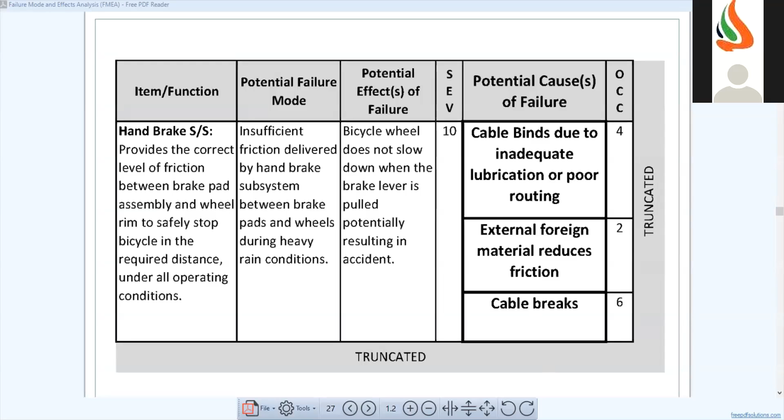Due to rusting, the friction will be reduced due to wear and tear. The friction will be reduced, right or not? What do you mean by foreign objects? If there is any dust on that, the friction will be reduced.

Cable breaks, so cable breaks are also a potential cause of failure. Why did we take cable breaks as a potential cause of failure? Because it also induces an indirect cause of failure. Cable breaks means, see, this is brake. This break is happening, this break is becoming two pieces. BRAKE versus BREAKS, this is a different break.

This is not hand brake. Okay, if cable breaks, if the cable becomes two pieces, it can cause a failure.

See, what is the occurrence? Occurrence means what is the probability of a

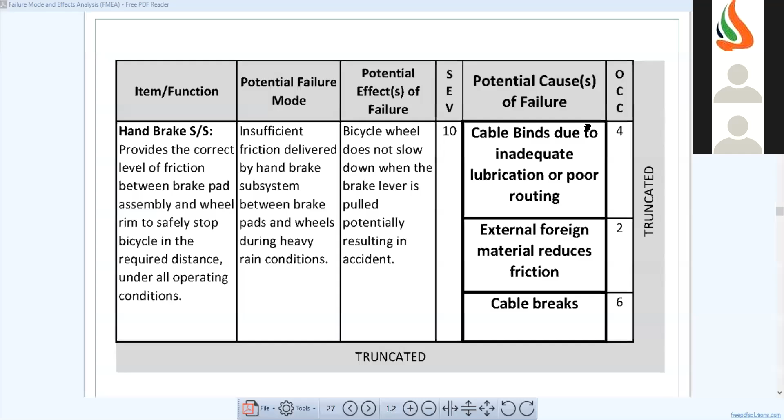Fine, occurrence is a ranking number associated with the likelihood. Occurrence is a ranking number that is associated with the likelihood of a failure mode, and this associated cause will be present in the item.

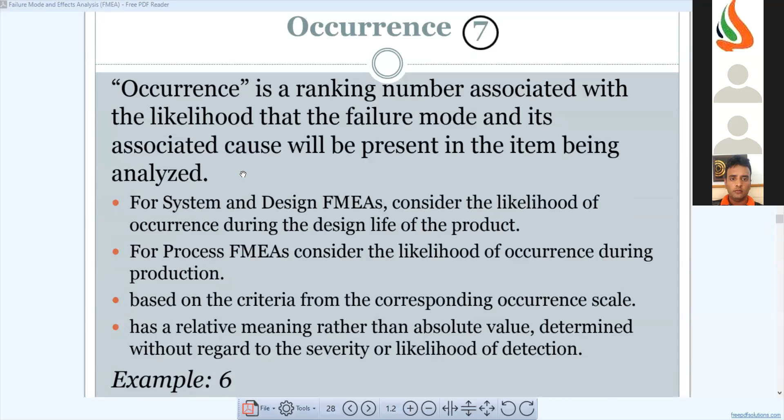Okay, we don't want to waste time. See here what we have. Here we have the rating of occurrence 5, 3. What is the 5 here? Occasional failures associated with similar designs, or in design simulation or testing. What is the 3 here? Only isolated failures associated with almost identical design, design simulation and testing.

So here, occasional failures. So what he is saying here is occasional versus isolated. Isolated means it's a failure which has low likelihood. It's a failure which is completely based on less likelihood. The probability is low, so failure also will be low.

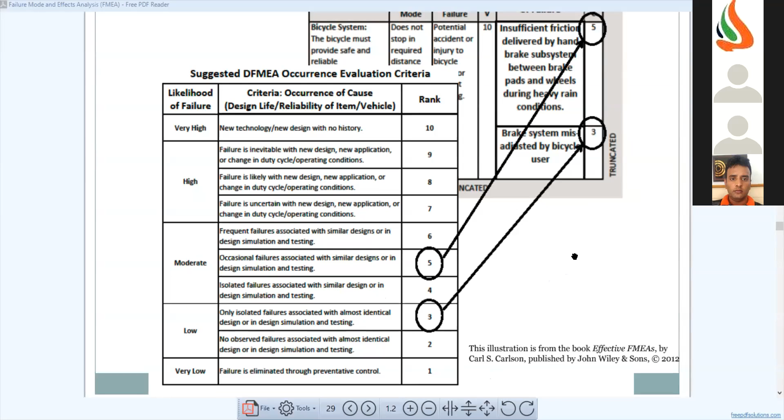So here, in which parts is he given 5 and 3? First one: insufficient friction delivered by the hand brake subsystem, occurrence is 5. Compared to 3, what he has taken: braking system misadjustment by bicycle user. This happens only sometimes, that happens often.

Okay, that's the reason occurrence is given, likelihood is given. Occurrence is something else. When you're calculating risk assessment, when you're doing risk matrix, when you're doing risk analysis, how do you calculate risk? Risk is a combination of likelihood and severity. So here likelihood is occurrence. Here in FMEA, occurrence is likelihood, severity remains the same.

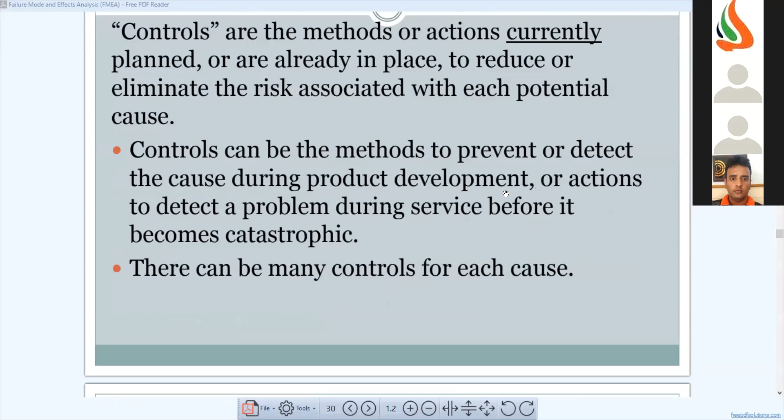Controls are methods or actions currently planned or already in place to reduce or eliminate the risk. Here we have potential causes and failures, and this current design controls and prevention. We have two terms here: preventive controls and detection controls.

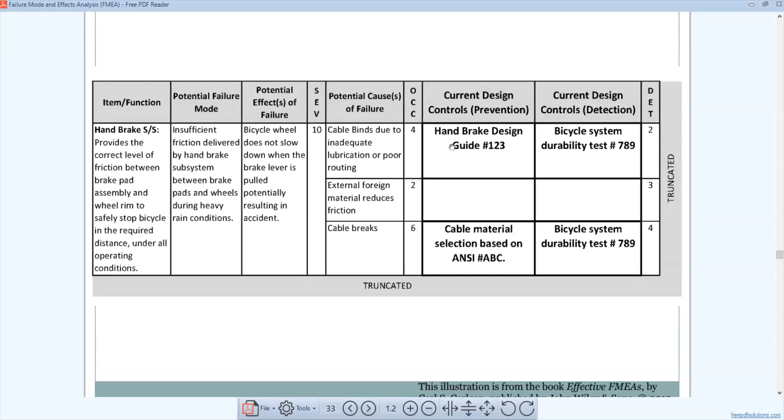So let's look at occurrence. What is a preventive control? Handbrake design guide - preventive controls always depend on the manuals, including operation and maintenance equipment.

The operator manual, or OEM - what is the manual we have for machinery? OEM, operators equipment manual. That is the design preventive control.

If we follow the operator manuals or operator equipment manuals, and if we have a clear idea on what to do and what not to do, that comes under preventive control. Cable material selection is based on some standard - let me confirm what it is.

Is it ANSI? Actually, in the digital world, ANSI is American National Standard Institute. Let me check this in Google.

So, cable material selection - why is this kept under preventive controls? Because it is not yet in use, it's not in the process, and it's not in the design. It is a basic decision which has to be made before commencing the work. This applies not just to cable material, but to any material if you relate it to different kinds of work environments or machineries.

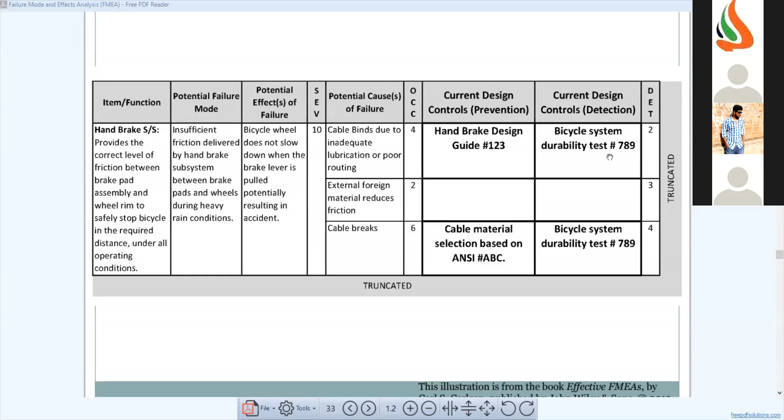Let me finish, then you can ask. How many times, please tell me. Yes sir, you are explaining in Telugu sir, and I don't know Telugu sir, so that's the reason I am continuously speaking in English.

Durability in Telugu is called manika. That's the reason I referred to Telugu people for that term.

For example, take one cycle - how much pressure will it sustain? Take the tensile test, for instance. Does anyone know about the tensile test? If any metal is there, they apply pressure on it and observe at what point it will break - that is called elasticity.

In the tensile test, all factors like elasticity, heat, and pressure are considered. Tensile means how much strain it can bear, how much pressure from outside it can withstand.

So for current design controls, they will do a durability test. The bicycle is kept on rollers, and they apply the brakes at different speeds and different parameters repeatedly. That is how current design controls work, as shown here.

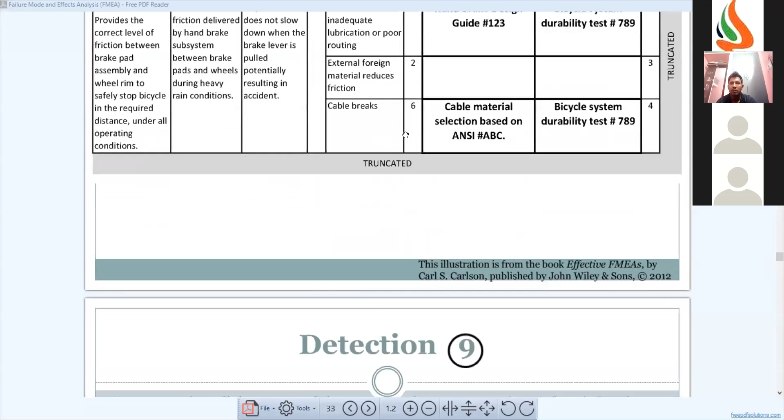So detection ranking is a number associated with the control from the list of detection type controls. It considers the criteria from the detection scale, and the likelihood of detection of a failure mode according to the defined criteria, relative ranking within the scope of FMEA, determined without regarding the severity or likelihood.

What is the last point? That it is determined without regard to the severity or likelihood of occurrence. It will not take the severity or likelihood of occurrence. Detection controls only take the inputs from durability test.

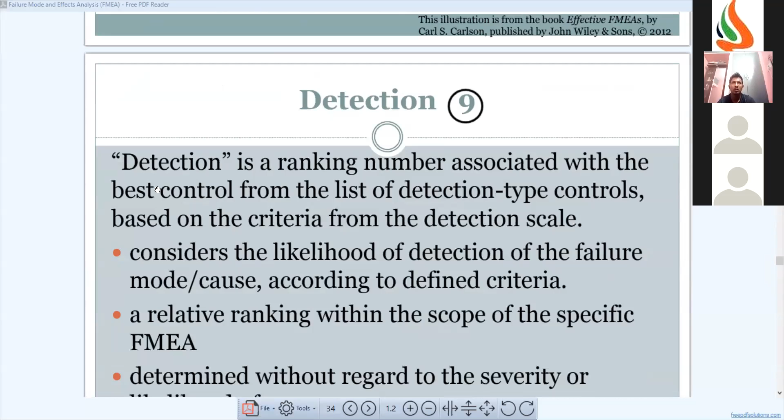If we ask FMEA, you have to write the detection part in such a way that the ranking number is associated with the list of detection type controls. What do you mean by detection type controls? What are detection type controls?

Durability test. If for example, see, I'm getting a lot of disturbance, I don't know why. BB Kumar, see, bicycle system.

If I'm buying a car, we know that if there is an impact, the airbag will come outside. Whether it comes or not, there will be a crash test, right? That is called detection controls, to detect whether the durability, whether things are going in proper way or not, and how many times it can come out in a proper way - how many times a brake can be applied to the cycle, how many times a switch can be kept.

There are phones now which are foldable, notes and all. They fold it for several hundreds of times. That's a durability test - how long it can sustain the usage of a person, extreme pressures, extreme temperatures. For example, if your bike is tested on rough hilly areas, in water, rainy conditions, in the pits - everything - the prototype is tested, and then the bike is manufactured.

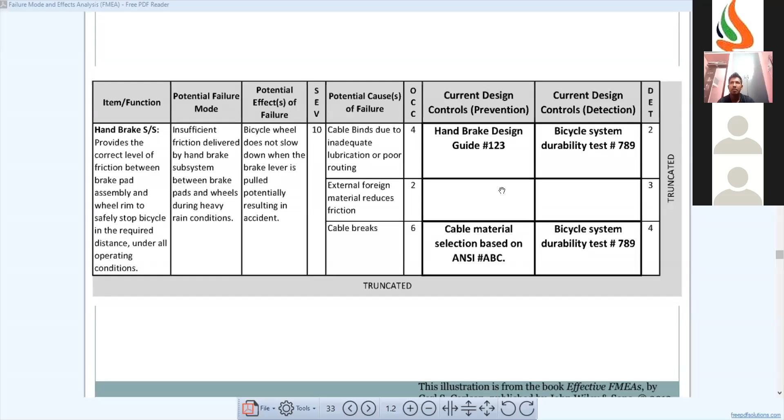Use of detection controls - if it is detected several times, we'll take it as 5, or if the same control or same failure mode is detected several times, we'll take it as 9, depending upon the likelihood.

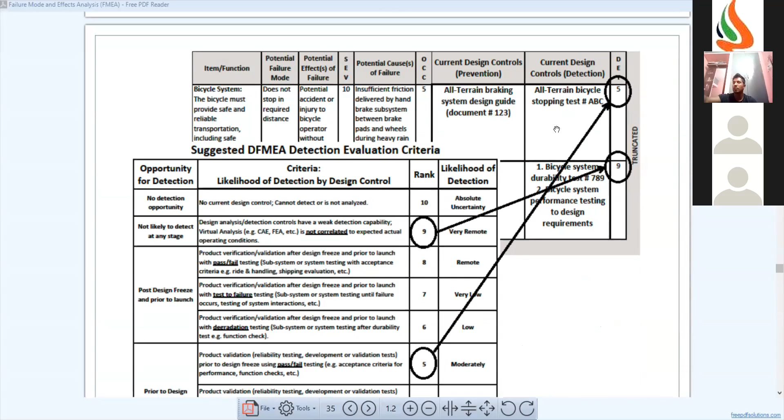He told moderate, very remote. If you're listening to this for the first time, you may not understand the complete concept. I'll be forwarding this PPT to the madam, and you can take it from her - hopefully she'll post it in your group, and you can have a look at it.

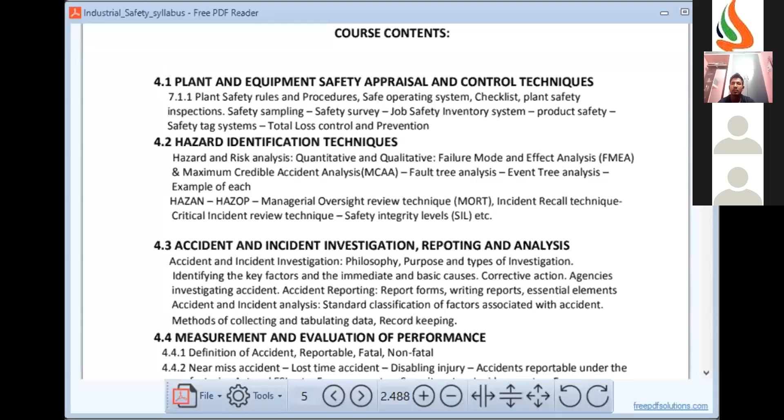And for the person who asked a doubt regarding the syllabus, here it is for quality control - we have failure mode and effect analysis on the first line, 4.2. I don't know whether he's present or not.

Screen sharing has stopped. The screen is shared, right? Is my screen getting shared? No sir, no sir.

Sir, do you have any other case study on this FMEA? Actually there are a lot of case studies. In this, the case study he has provided is good - the bicycle one. If you want other case studies, I can provide them to you.

You can take a case study from your office and relate it - you can do a case study yourself. There are a lot of case studies, you can get them on the internet also. Each and every case study has its own perspective, so the process is same but perspectives will be different.

Risk priority number - I've told you, the risk priority number is a combination of severity of an effect. How severe the effect is - we have seen the 10, because at the beginning slide we have seen 10. Likelihood of occurrence of cause, likelihood of detection of cause, occurrence of cause - how many times the particular cause, the reason why the failure has happened, may occur.

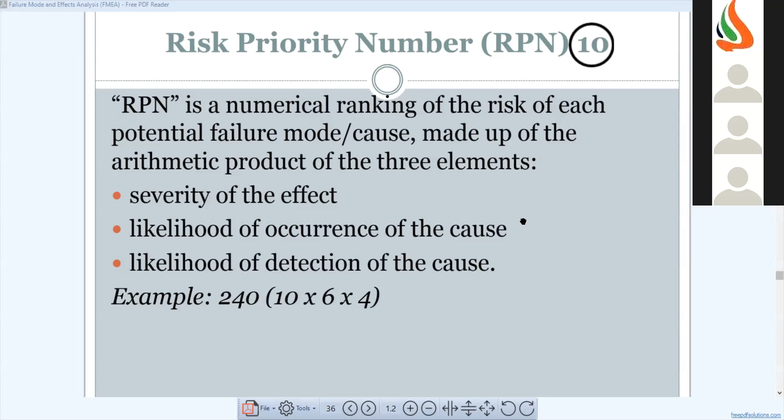RPN is not the preferred presentation of risk associated with the failure mode and associated cause, subject to it not being continuous. The continuous issue arises because once RPN is calculated, it will be subjective.

Let me ask you one question, just to check whether you understand or not. If the detection process takes place, suppose we have a bike prototype and we are doing detection analysis. We found one fault occurring repeatedly.

So that likelihood we kept here in the detection likelihood of the cause. If it is 4, for example, after rectification of that fault, in the case where we said the bike is tested in a rainy environment and it's getting off, later they will give control measures and test it again.

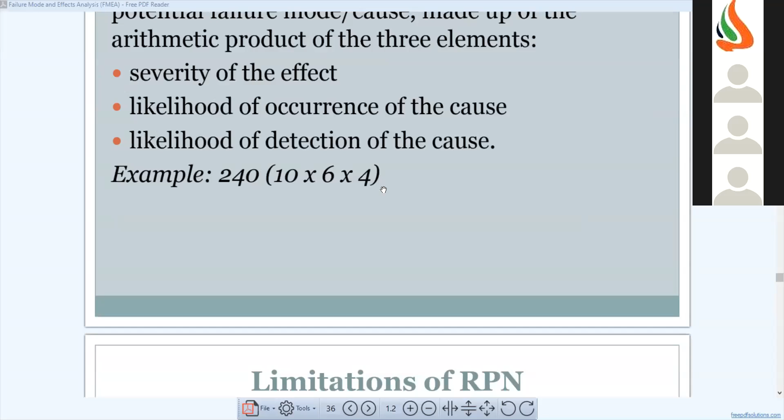Then what do you have to do? The detection cause number will change, right? Yes or no? So from the beginning you have to start changing all the effects, causes, and everything. Once that is done, it becomes subjective and it will not be continuous. Sometimes it is very difficult to change everything from the beginning.

Normally this FMEA will be recorded as a file, so it will be like a case study. If we want to change or update any potential failure modes, occurrences, causes, or anything, you have to do it again from the start, and the values will change.

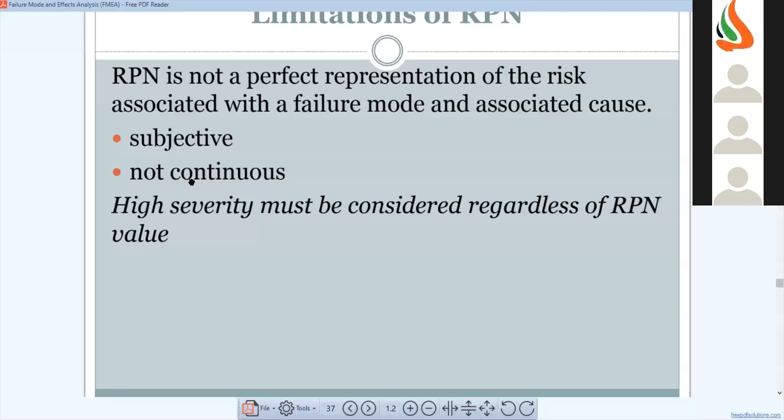Now we are talking about recommended actions. If you are doing any investigation, FMEA is a type of investigation, it falls under investigation methods. There are many investigation methods, and if you're doing any investigation method, you have to follow a certain process. You should not mix everything. Either you do ICAM analysis, 4P analysis, FMEA, job safety analysis, or non-job safety analysis, which also comes under this.

Does anyone know about ICAM? What do you mean by ICAM?

There is something called the incident cause analysis method, normally called ICAM, meaning what is the incident and what is the cause of the incident analysis method. ICAM analysis is near to FMEA but not completely in line with it.

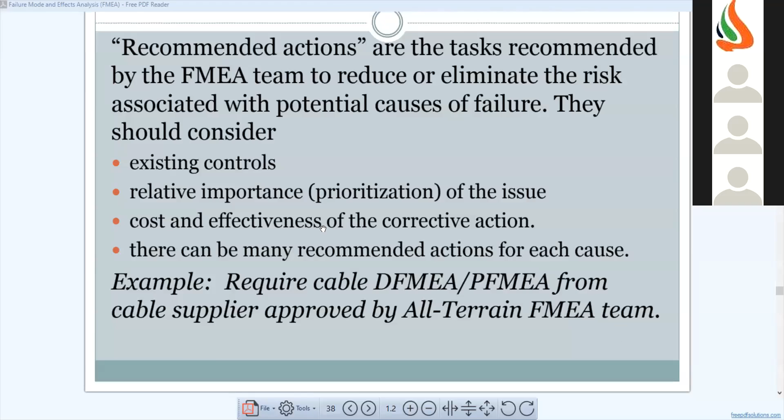Sir, you are not getting a voice. I'm sorry, I got it now, fine.

We should have the recommendations in such a way that it should be cost effective, and the priority should be taken into consideration. If there are 10 findings, you have to prioritize which one has high risk and which one should be rectified first. In that way, the recommendation actions should be given.

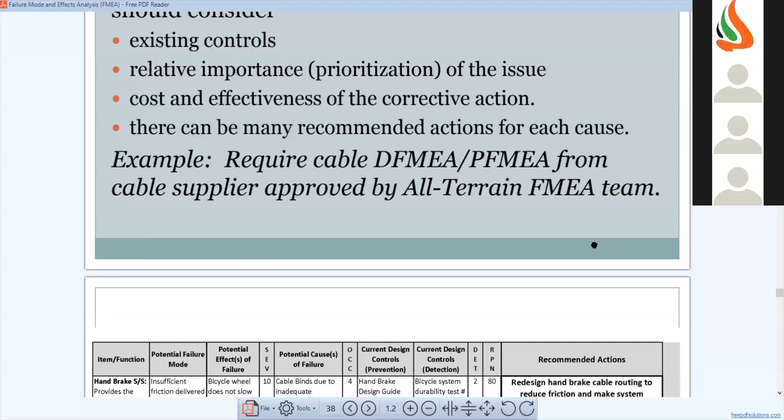Coming to this slide, it shows you a clear recommendation action. See how the RPN number is 80 here. It is because of the combination of severity, likelihood of occurrence which is 4, and detection which is 2. So it became 80 here, right? Fine.

Here it became 60 because the severity remains the same throughout, because only this function is defined, not the second function. So here potential causes of failures are different, n numbers.

This one I want people to understand very well. So what is here? I'll take one example. For example, the last one: selected brake pad material does not apply required friction on the wheel. That is the potential cause of failure, because when the friction is not there, it can fail.

What is the occurrence? The brake pad, he told, this occurrence can happen 2. He has given 2. Likelihood is less.

So he has not mentioned this control design prevention. So we'll take one control design, control prevention. So handbrake guide cable material selection based on cable breaks, cable shattered, brake broken into 2 pieces.

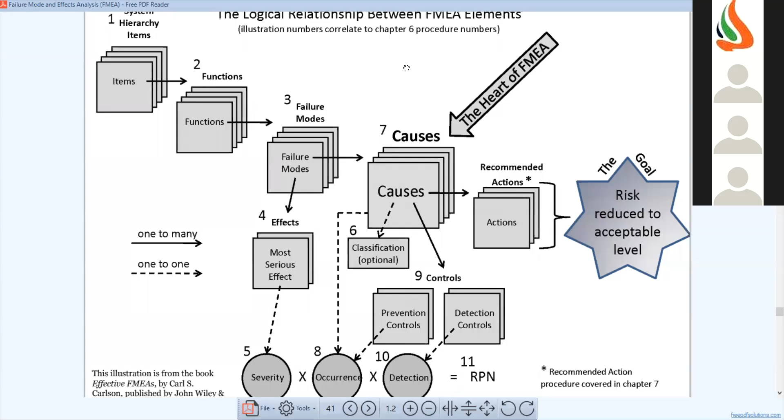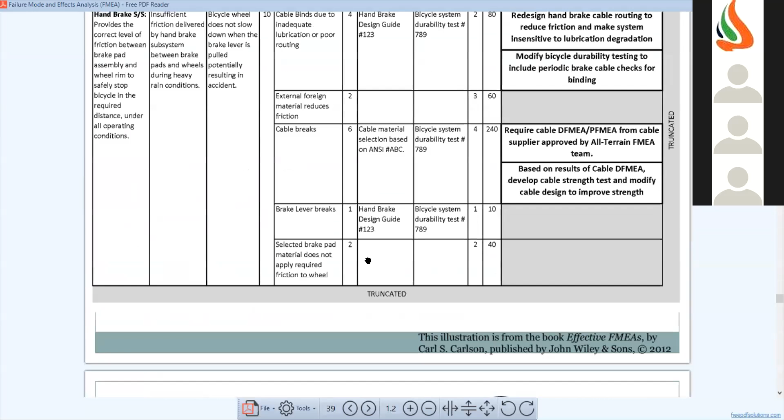The table: for some of the causes, they are not mentioned any prevention and detections. Yes, the last cause he didn't mention any prevention and detections. But he has kept the detection. We can assume the same thing for this also, because it is a brake pad. We can take the same thing: handbrake guide as a prevention.

Bicycle durability test also comes under this friction of the wheel. We'll take it as the same thing. Otherwise, if you want to keep it in detail, you can keep it here. You have to say what you have to keep here now.

See, selected brake pad material does not apply required friction on the wheel. So you have to see the wheel friction, handbrake guide, the same thing.

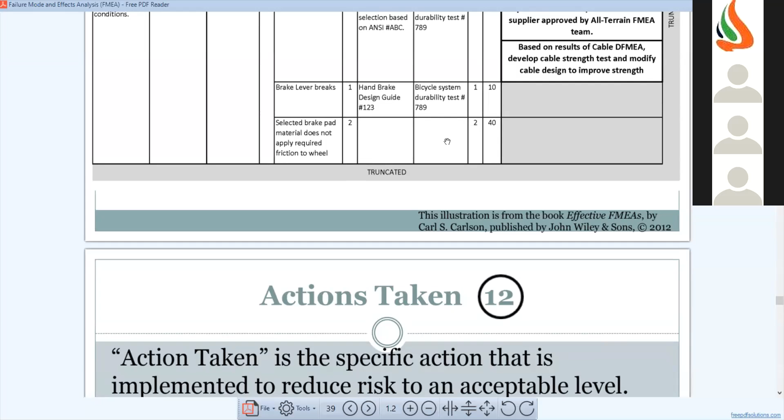And here what will you have? You will see the bicycle system. Here you will not see bicycle system design, you will say bicycle subsystem design durability test, that is, in particular, brake pad durability test. Understood? Implementation actions also you have to put in that same way.

So, effects are directly subjected to severity. See here, if it is a dotted line, it is 1 to 1, directly related to severity. 1 to many, if it is a block, like what we say, a thick line. Causes, so causes, what we have?

Causes we have actions, controls, and classification. That's a classification which can also divide into different ways. You can classify one cause in brake system or process system causes in that way. So controls 1, 2, 3, 4, 5, sixth one is classification, seventh one also we have cause.

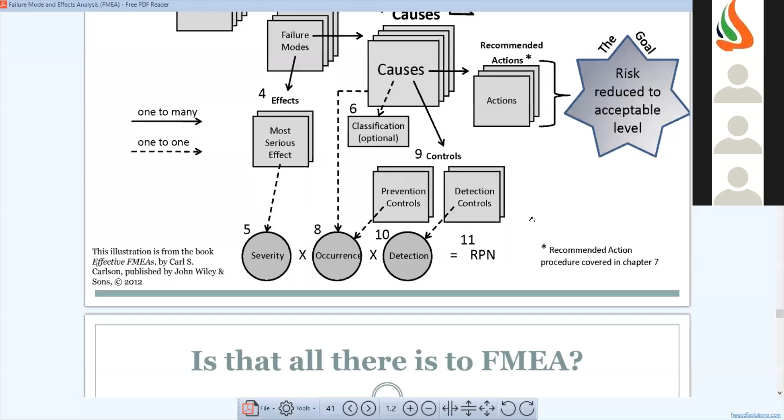Then the goal is the risk reduced to acceptable level. Risk is reduced, this is what we need. Success factors, it is all simple points. The team should have brainstorming, encouraging participation. Brainstorming means you should have a team formed, not a single one.

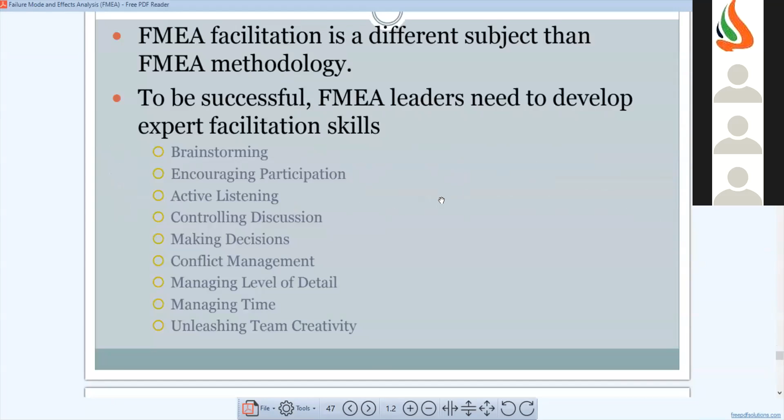Controlling discussions. These are the references you can take from the other sources. What I've discussed, the core concept I have discussed, this is the final thing. This slide you have to remember very well, this slide, and also the first one.

This is the skeletal representation. This is also very, you can see at the last he has given one revised ranking. Why has he given that?

Because after effective completion, after a responsible person takes actions, the severity will be reduced, occurrences will be reduced. Detection will be reduced? No. So simultaneously what happens? Risk priority number will be reduced. It will be reduced to the acceptable limit. That is the main concept we have to understand.

What is the main objective of our FMEA? To bring down the risk to acceptable limits. Why are we doing all this? There are risks, many of them, so we'll reduce it to an acceptable limit. That is our main concept, not only FMEA, that is the main objective of job safety analysis, any investigation purpose.

Risk assessment. See, risk assessment is a part, risk assessment is different, risk analysis is different. Risk analysis is a part of risk assessment. Risk assessment is qualitative analysis and risk analysis is quantitative analysis. In risk assessment, it is divided into hazard identification.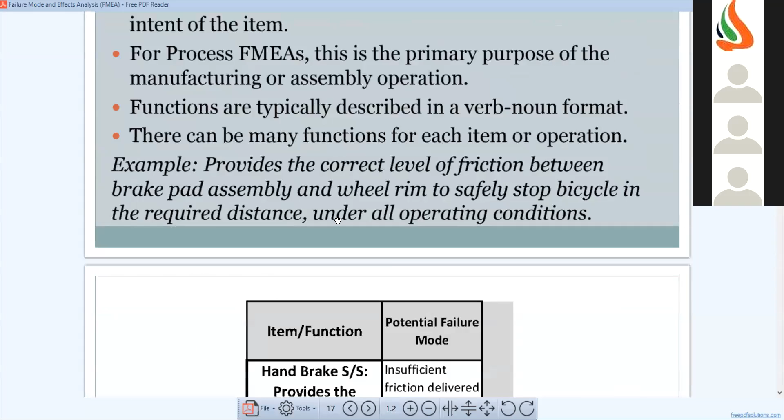Like, I don't want it to be that you didn't understand anything. You understood a framework, right? You work on it, you apply it in your real-time scenarios. You read this PPT in such a way. These pictorial slides are there, right? This one, you read them. If you don't understand any potential effect or not, then you can see the definition and you can understand.

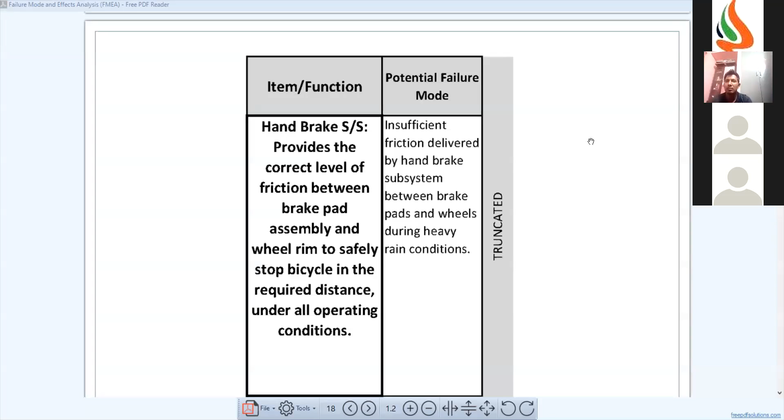Sir, when it comes to detection, if it gets detected easily, then we can give the less ranking? Yes, less rank. Not like that. If it is detecting easily and it is detecting n number of times, if some fault is detected, same fault is detected easily but it is detected 5 times, versus if a major fault is detected easily but it is detected only 2 times, then you will give the lesser fault the higher ranking. The likelihood of detection you have to take into consideration, not easy, not tough, likelihood. Very good.

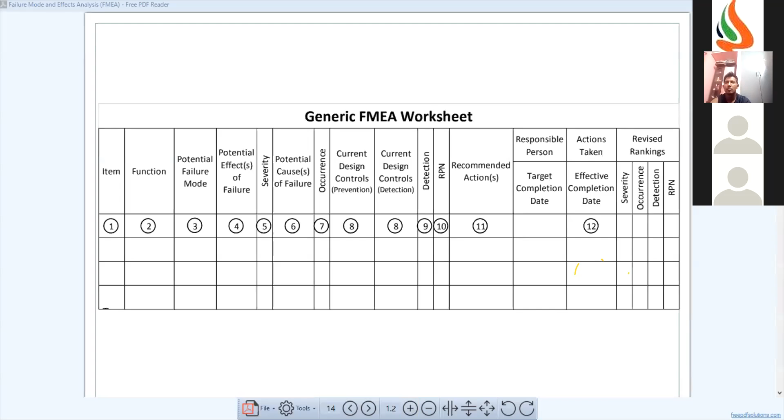Any more questions? So here we have this, and we have a lot of syllabus.